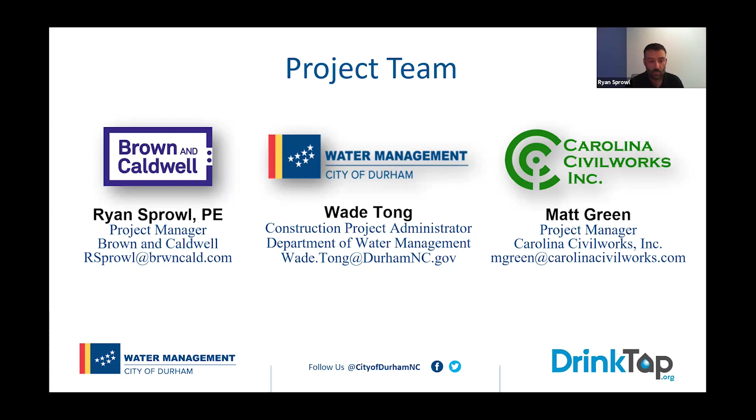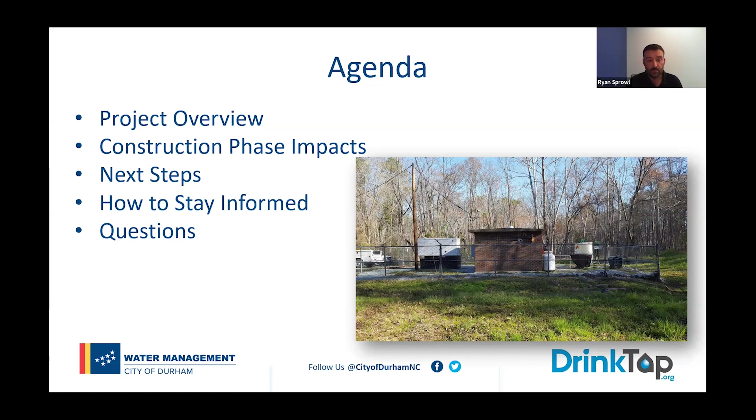Matt Green is with Carolina Civilworks, who is the contractor performing the work for the city on this project. Moving on. So the agenda for this meeting is shown here. We will provide a brief overview of the project. We will summarize construction phase impacts. We will discuss next steps, give you information on how to stay informed, and discuss any questions you may have.

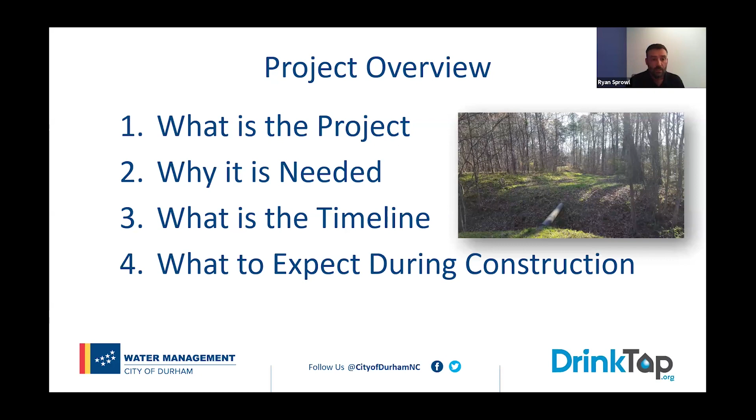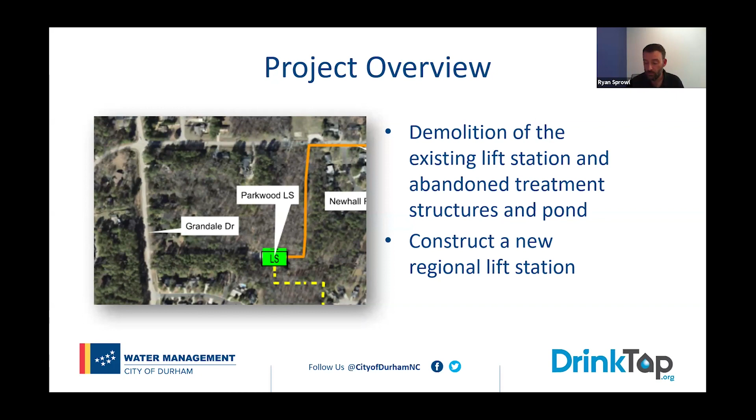So the work associated with the new regional lift station includes demolition of the existing Parkwood lift station and abandoned treatment structures and pond previously owned by the county, and construction of a new regional lift station, associated equipment, a new site layout, and an improved drive. The work associated with the new upstream gravity sewer includes removing from service and demolition of the existing Newhall lift station and Elmset lift station, constructing a new 8-inch gravity sewer that will run behind properties on Newhall, Pendleton, and Elmset, from these two lift station locations to the new regional lift station.

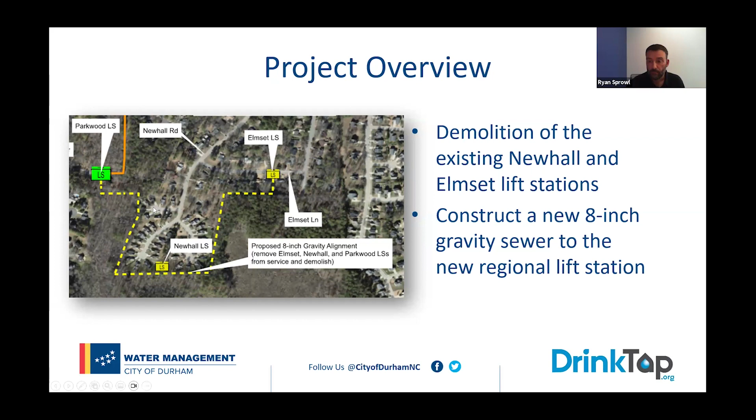And the work associated with the new sewer force main includes constructing a new 10-inch force main from the new regional lift station, which will go up to Sedgwick Road and run through one lane of Sedgwick Road up to Revere Road at its discharge point. In conjunction with that, we will be abandoning the existing 8-inch sewer force main that follows a similar alignment as the new force main.

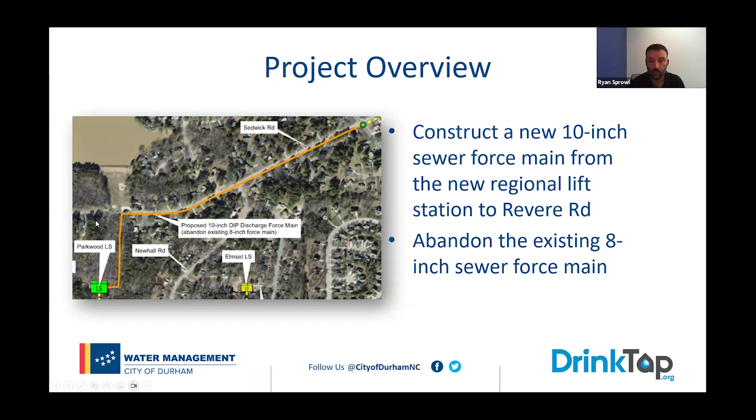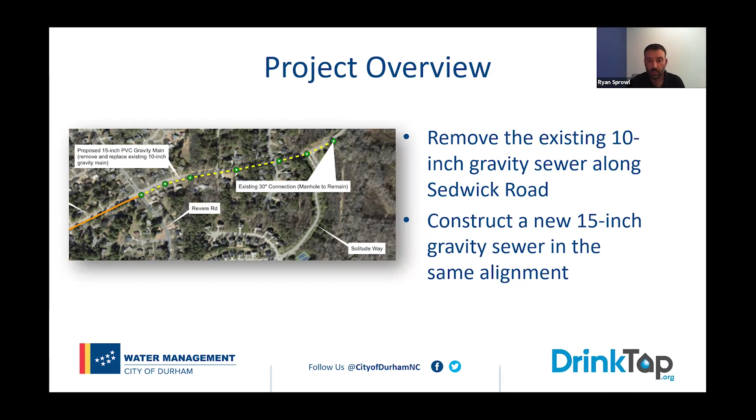The work associated with the new downstream gravity sewer includes removing the existing 10-inch gravity sewer and associated manholes that currently run from Revere Road down to just east of Solitude Way, and replacing that existing sewer with a new 15-inch gravity sewer and manholes in the same alignment. So why is the Parkwood area lift station consolidation project needed? The city desires to replace the aging infrastructure in the project area and increase the service life and improve service reliability. In addition, the system is in need of a size increase for additional sewer capacity.

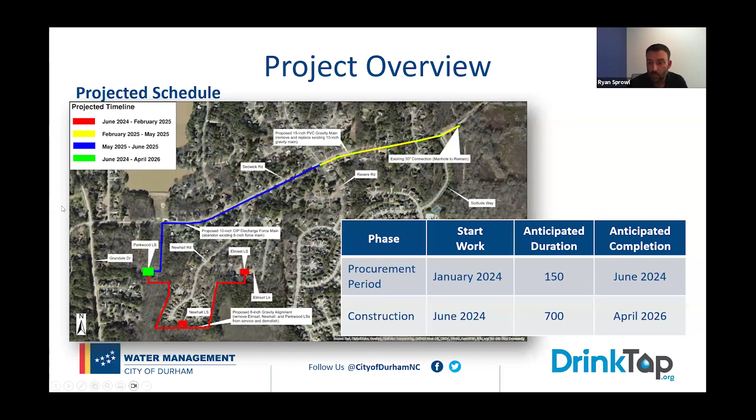All right, so now we'll move on to construction phase impacts. Starting with impacts to residents, please note the following items. There will be intermittent impacts to residents, typically occurring during work days. The typical work hours are 7 a.m. to 6 p.m. The contractor will be on site with heavy machinery for excavation and installation of the lift station, sewer piping, and manholes. Noise impacts are unavoidable, but will be minimized as much as possible. And sewer services will be tied into the new system. And we don't anticipate any extended service interruptions for any residents.

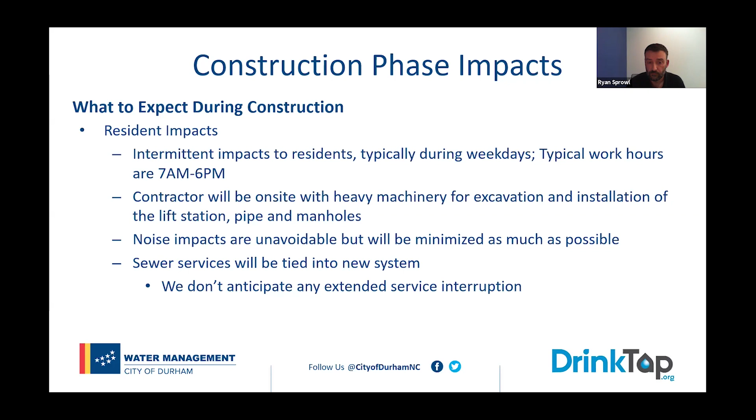There will also be traffic and pedestrian impacts along Sedwick Road, including trucks and equipment hauling materials to and from the work site, a lane closure during installation along Sedwick, including both a travel lane and a bike lane. Traffic control and/or detour signage will be on site. Access to homes and side roads will be maintained at all times. And temporary steel plates, stone, or asphalt patch will be used until final restoration of driveways and streets.

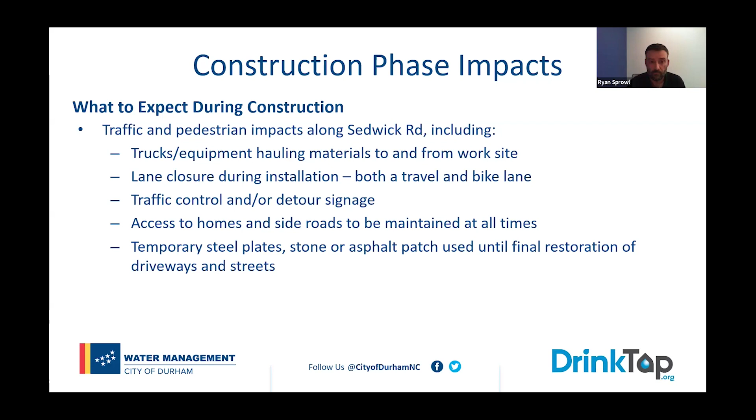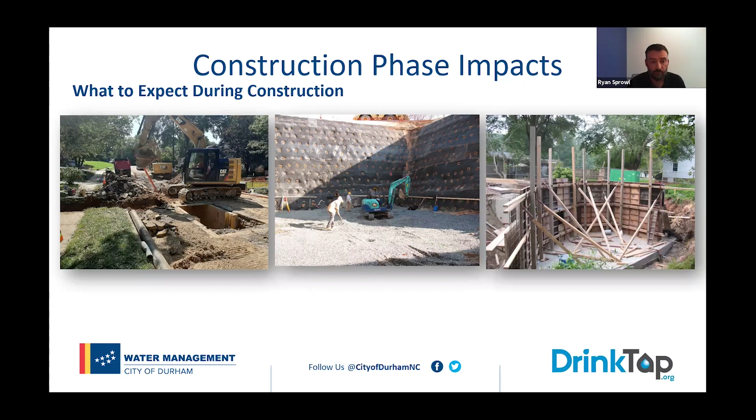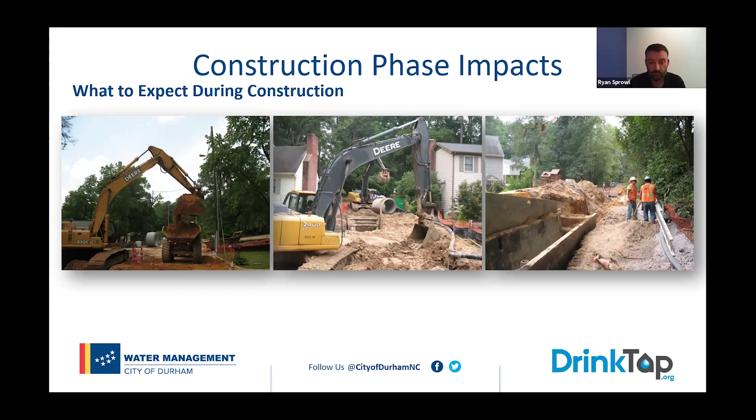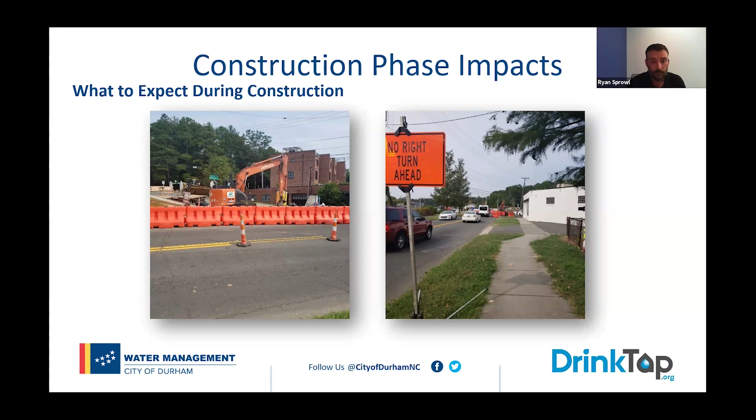All right, and so we'll move on to next steps. So the next steps for construction include notifications distributed to property owners near the initial work areas, pre-construction video documenting existing conditions, the contractor mobilization to the site, which will include equipment and materials beginning to show up. Then when construction commences, you may see fresh paint on the ground designating the location of existing utilities, staking and flagging establishing the limits of construction, erosion control measures being installed, including construction entrances, silt fence, and orange tree protection fencing, initial clearing of the immediate work area, temporary bypass systems being set up, with excavation and installation of the gravity sewer starting soon after.

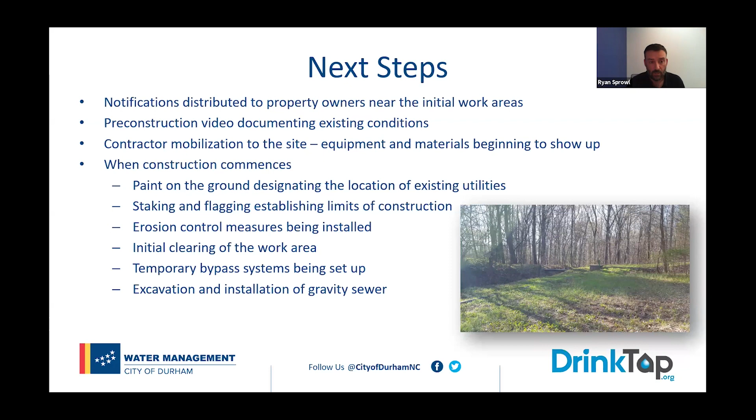So as mentioned on the last slide, property owner notifications will be distributed by the contractor. These will be provided to the initially impacted properties approximately 1 week prior to starting work. Other impacted owners will receive notices as the work progresses to the area near their properties.

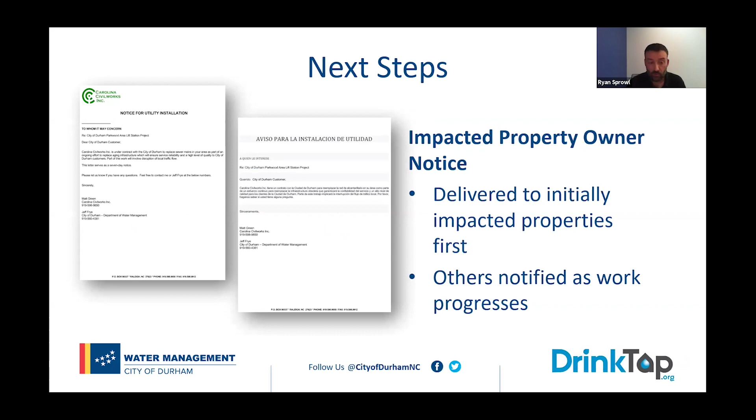All right, so how to stay informed. I'll now turn it over to Joe Looney with the Department of Water Management.

Thanks, Ryan. I just put some information in the chat. So there are a couple different ways that you can stay informed about this project. One is to sign up for city news alerts on our website, and I've included that link in the chat. That's the durhamnc.gov list.aspx. And when you go to that site, you'll just scroll down, and you'll see it'll say project updates, Parkwood area lift station consolidation project, and you'll just hit notify me about that,

and you enter your email address, and then I think we're going to be doing updates on this every 3 weeks on a regular basis. And then if there are any really big changes or important news or an important change to you, the residents of that area, we'll do those as needed.

And then you can also visit the website for this project, which is durhamnc.gov/5213. And that will have these meeting videos and we will keep that updated. And yes, the website hasn't been updated since March, since we're waiting on this meeting and to get the notice to proceed for construction, which is where we're at. So that's what I have for how to stay informed.

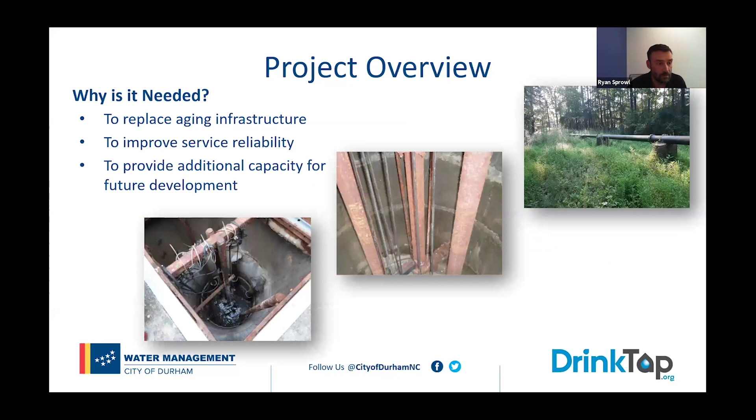So it looks like that is along the portion between Revere and Solitude Way. So yes, that would not start to be addressed until February unless the contractor ends up being ahead of schedule, but that's not anticipated at this time.

Hopefully that answers that question there. And then Chuck brought up job spec, says that bypass pumps will be electric. So the lift station bypass pumps will be electric, or at least the main one. There'll have to be a backup in case we lose electric power. So that will be diesel, but that will only run if we lose electricity in the area. But all of the remote locations will be diesel powered because there's not an electrical supply to tie those to.

And if I recall, Chuck, we did discuss that in the field when we were out there. I know it's been a couple of years since we met out there. But the main bypass that'll run for the majority of the project will be electric.

Are there any homes that still need to move fences or other personal property from the work area? What are next steps for any conflicts there? To be honest, I'm not sure if any properties still need to move their fences. That would have been negotiated with the homeowners when we were doing the easements. If there's anything left in the way, then the contractor may be or will be prohibited from moving forward. So we just need to make sure that those that were agreed to in easement acquisition are addressed before they get out there.

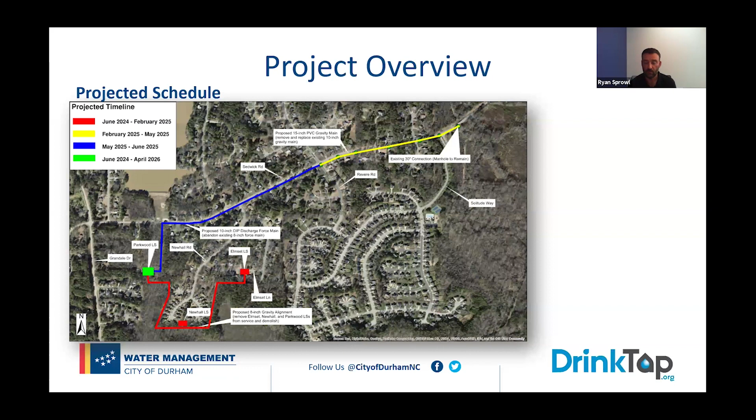Next question: what have been the biggest problems and complaints in prior projects of this nature? I think that's a good question, and I don't know if Wade, you would have anything that you could say to this, but it really varies from project to project. And it depends on what you mean by problems, if you mean problems for the contractor, for the city, or for residents. So, Wade, would you have any thoughts there?

I'll say some of the biggest complaints we have normally involve not really understanding the process. They come through and dig your yard up, and sometimes they get it straightened up some in a week or two and get some temporary seed down. And then, a couple months later is when they're doing their final restoration. But in between, people are complaining a lot about, my yard doesn't look like it did. Well, it's because they're not done yet.

They kind of want to get everything done so they can come do one good restoration sweep on the way through or something like that. It tends to work better than trying to do each individual yard. As you go by, you do a temporary restoration, you come back and make it look right and try to get everybody as happy as you can. That's been one of the major complaints that we deal with. A lot of the projects downtown, I project manage those, and people have very specific, I want my yard to look like this, but we have to treat everybody the same, and we try to do a good job.

Other than that, it's some dust and noise. It is a construction process. We try to respect the work hours, and we do a really good job of that. And when we have problems we address them as they come up. If somebody feels it's too loud, we try to make adjustments and maybe put some sound attenuation devices in, or try to deflect the sound up instead of out. And sometimes that works and sometimes it doesn't, but those are the major ones we end up dealing with. All right, thank you.